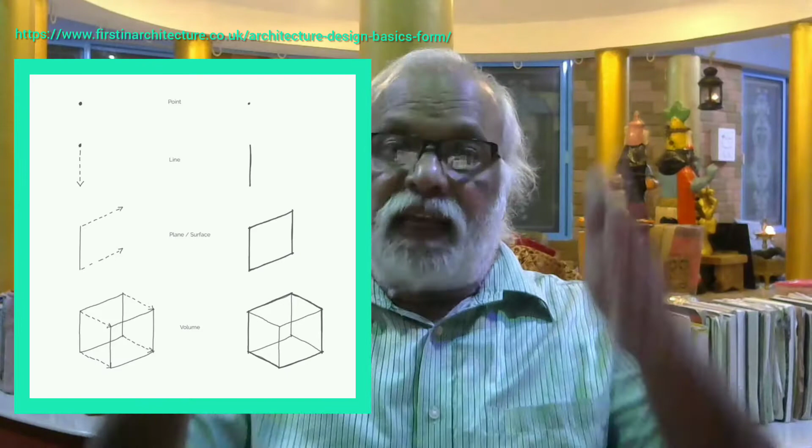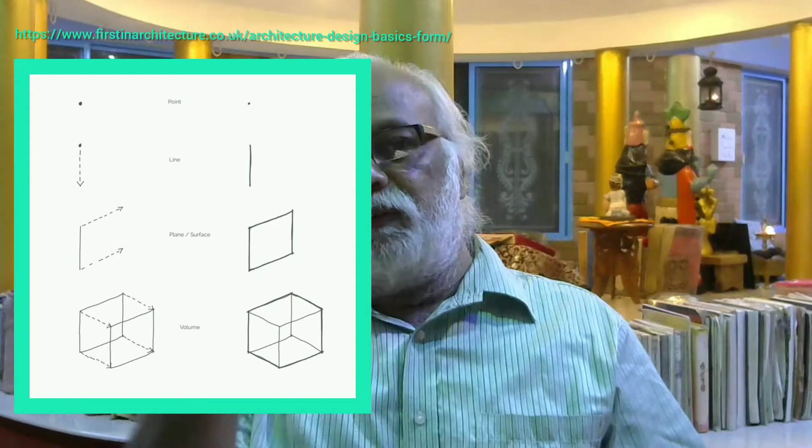If you just take the coconut tree, the coconuts are acting as points. That's what we have to understand. Comparing to the dimensions of the coconut, the point element there is nothing but the coconut. So first we told that a point doesn't have dimensions, so the coconut obviously has dimensions. That is the thing. Here, so many clauses are subjective.

We have to interpret things as you interpret classic literature, when you start comparing Shakespearean acts or the writings of a novelist. The interpretations have to suit the environment. There will be some ornamentation to the facts, and this ornamentation plays a very important role in architecture.

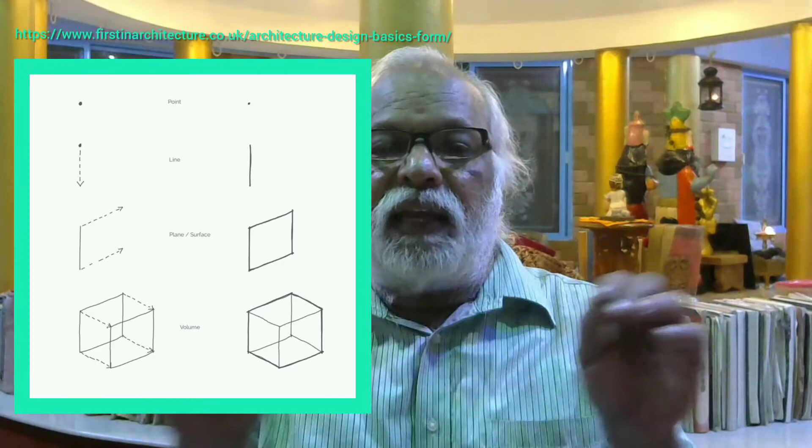Ultimately, what you get as the outcome is the external feeling a viewer gets from a particular creation. That is the result of good architecture, for which the elements an architect uses: one is the point, second is a line.

Line is defined as a linear element connecting two points. Or in other words, a line is nothing but infinitely arranged points, one touching the other with infinitesimally small dimension. A series of points connected together with infinitesimally small objects - that's a line.

So point, line. Line has one dimension, either in the x direction, the y direction, or the z direction. These are the axes on which an architect evolves a form: x, y, and z. So the first element has no dimension. The second, a linear element, has one dimension. Obviously, the third element is nothing but a planar element.

A planar element will have either the x and y plane, the x and z plane, or the y and z plane - a rectangle.

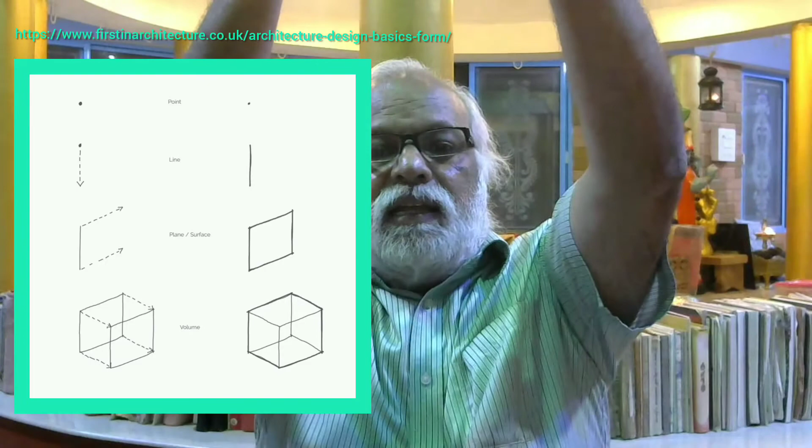We have to give an example for a linear element: Qutub Minar in India. The height is considerable compared to its lateral dimensions, so an example for a linear element is Qutub Minar. The Eiffel Tower of Paris - if you see the top portion, the upper part of the Eiffel Tower - it is converging towards a linear element.

Now a wall of a residence is nothing but a planar element. The Great Wall of China is also a planar element.

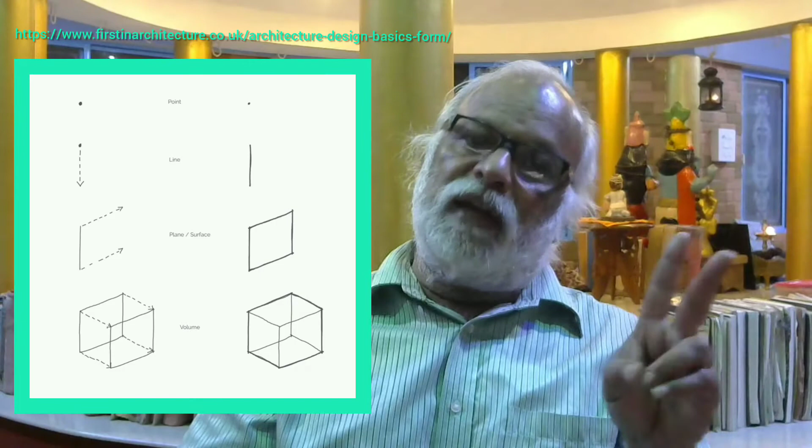Then x, y, z - the third is the form, the solid. So point, line, plane, solid. A solid will have... a plane will have two dimensions, so the third dimension, even though it may exist in architecture, will be considerably small compared to the other two dimensions. In a linear element also there will be some width and depth, but those will be very small, and the larger dimension will mask or dominate the other two dimensions.

In form, it is not so. All three dimensions will start competing with each other. All will be proportional to each other, or even if they are not proportional, they will start competing with each other. The existence, significance, relevance, and importance of all dimensions are equally taken care of.

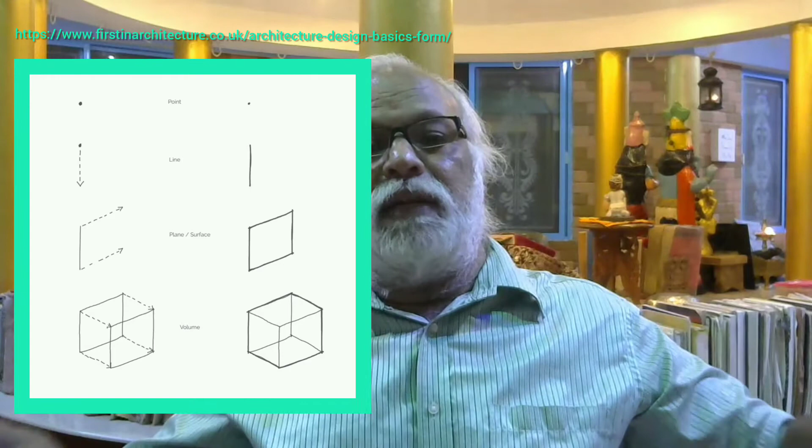So the term in architecture is the competition of elements. In a point, there is no element to compete with - a point competes by itself. In a linear element, the larger dimension competes with the other two dimensions. In a planar element, these two dimensions start competing with the third dimension.

In a solid or a form, an architectural slogan is 'form follows function.' That is the modern architectural slogan - any form follows its function. You can quote so many examples for forms; all existences of solids are forms.

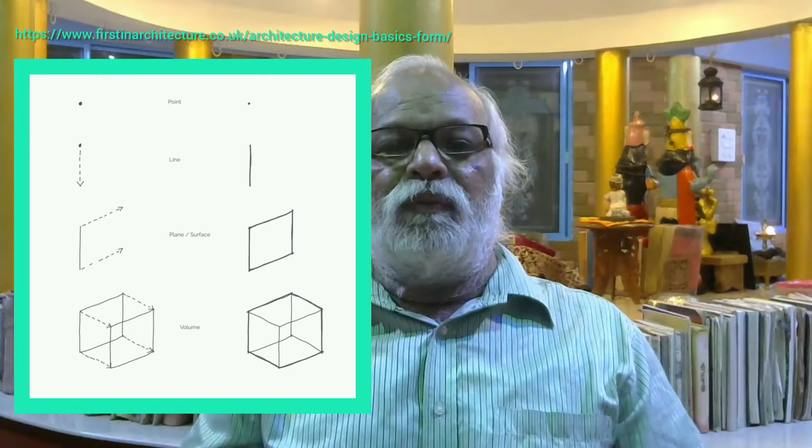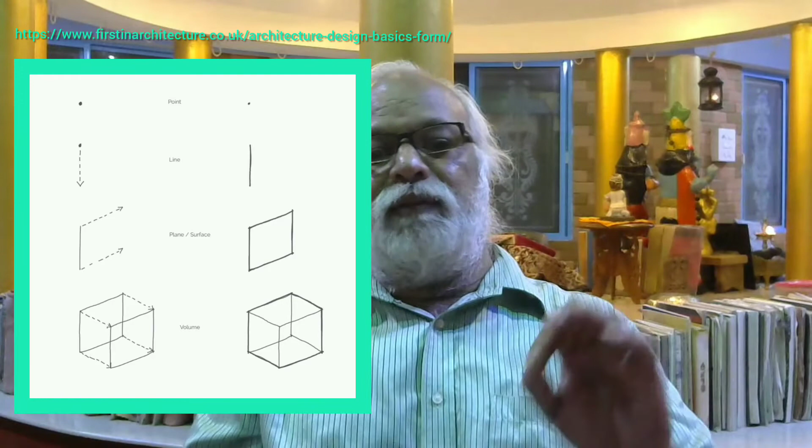In architecture, a solid need not literally be a solid having matter inside. For example, a room has four walls and an open space inside - open space meaning space without any objects. You get an enclosure by having four walls; that is called a solid. A room is called a solid, but geometrically or mathematically we cannot fully agree, because there is a void - it is not only solid, there is some void in between.

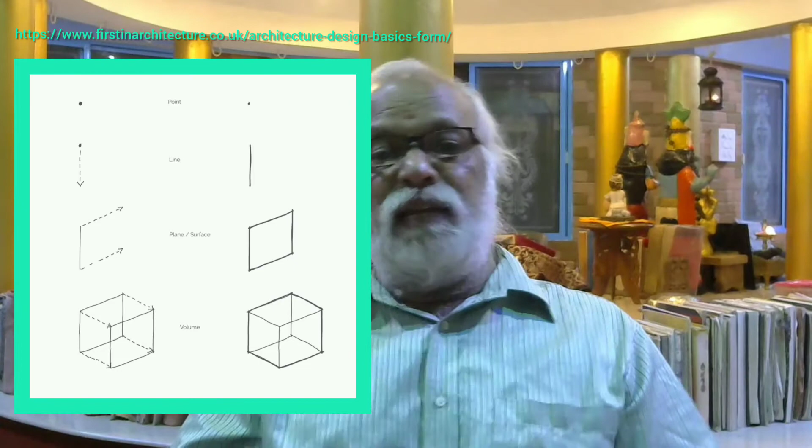So these are the four elements in architecture. I don't know if in the start I had told you three elements - if I told it like that, it is wrong. It is four elements: point, line, plane, and solid. Architects work with these four elements and evolve different forms to follow a particular function, using a lot of creative principles in architecture.